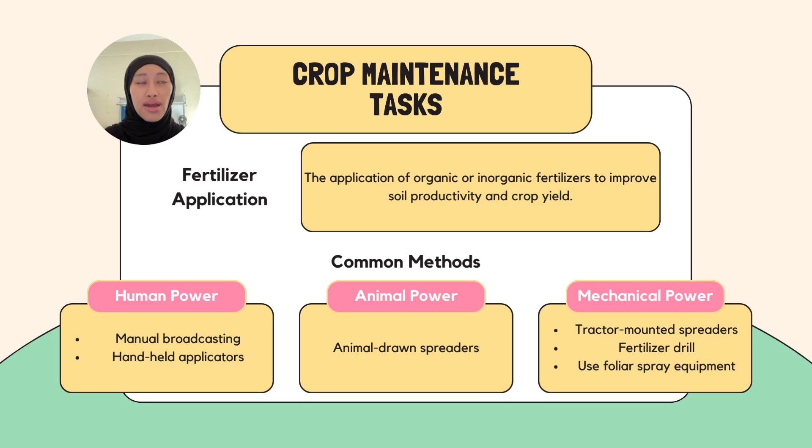Now we continue with the tasks performed in crop maintenance. Firstly is fertilizer application, which is the application of either organic or inorganic fertilizers to improve soil productivity and crop yield. Common methods include three types of farm power: first is human power, consisting of manual broadcasting and handheld applicators; next is animal power, using animal-drawn spreaders; and lastly mechanical power, using tractor-mounted spreaders, fertilizer drills, or foliar spray equipment for liquid fertilizers.

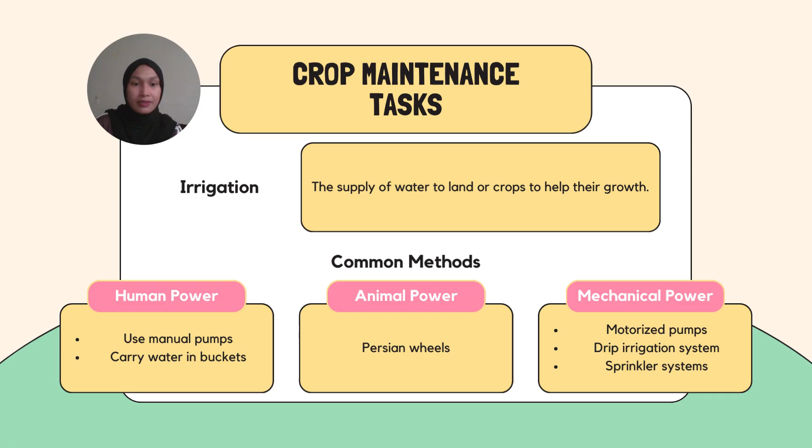The second task of crop maintenance is irrigation. Irrigation is the supply of water to land or crops to help their growth. Common methods can be classified into three: first is human power, using manual pumps or carrying water in buckets; second is animal power, using Persian wheels; and third is mechanical power, for example motorized pumps, drip irrigation systems, and sprinkler systems.

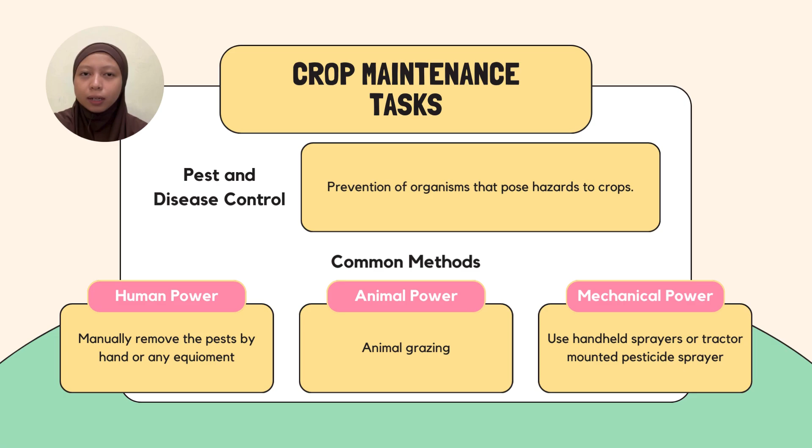The third task is pest and disease control, which is the prevention of organisms that pose hazards to crops. This can be classified into three common methods: human power, animal power, and mechanical power. For human power, we can manually remove the pests; for animal power, we can use animal grazing; and for mechanical power, we can use handheld sprayers or tractor-mounted pesticide sprayers.

Okay, now let's take a look at the equipment and machinery used in crop maintenance that is available in our company.

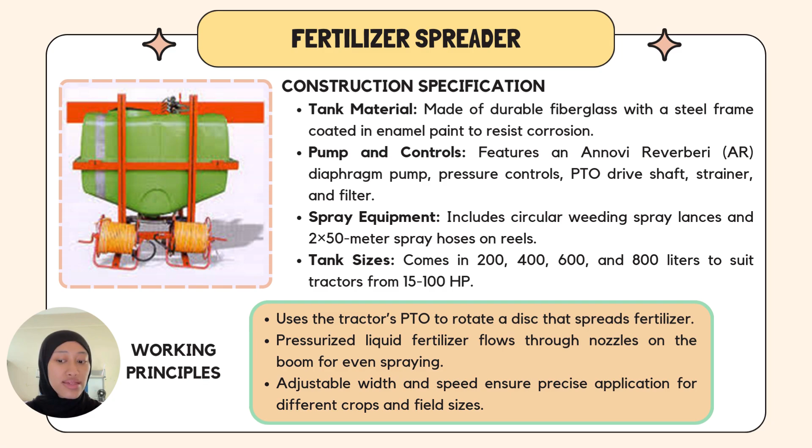As for the working principles, the MDEC fertilizer spreader is a tractor-mounted spreader. It uses the tractor PTO to rotate a disc that spreads fertilizer. Then the pressurized liquid fertilizer flows through nozzles on the boom for even spraying. It has adjustable width and speed that ensure precise application for different crops and field sizes.

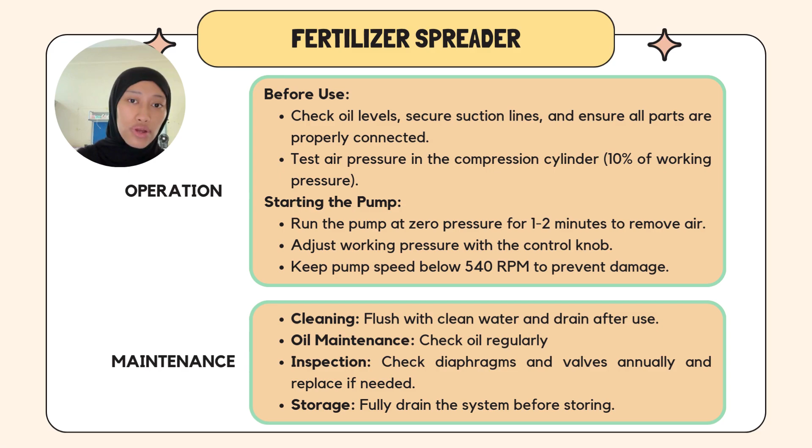As for the maintenance, there are 4 main points here, such as cleaning, which is to clean the tank by flushing with clean water and drain after using it, and the oil maintenance, where we need to check the oil regularly to make sure it's in the required level, and do inspections such as checking the diaphragms, pump and valves annually and only replace if needed. And lastly, storage, where we fully drain the system before storing.

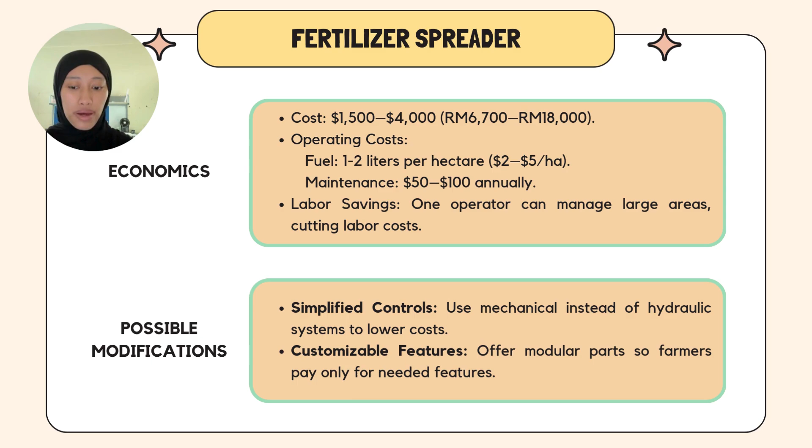Next is the possible modifications that we can do to cut costs for this spreader, such as using simplified controls that use mechanical instead of hydraulic systems to lower the cost. And then we also can make some features customizable by offering modular parts, so farmers pay only for needed features. So that's all from me.

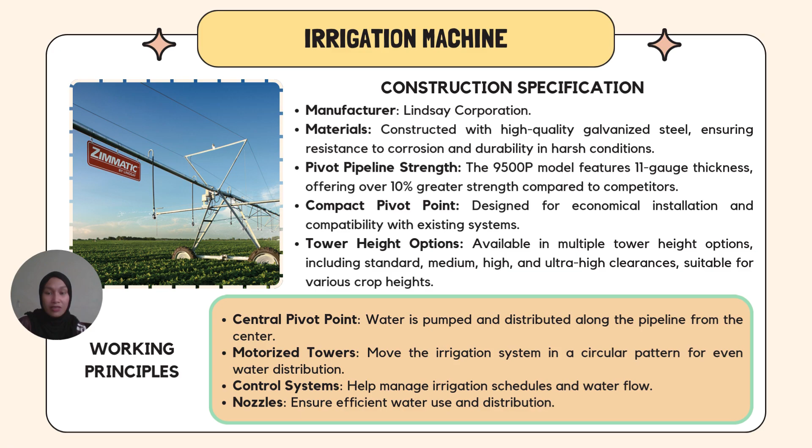The working principle of the Zimmatic system revolves around the central pivot point where water is pumped into the system and distributed along the pipeline. The motorized towers facilitate the movement of the irrigation span in a circular pattern, ensuring uniform water application across the field. The advanced control system allows precise regulation of irrigation schedules and water distribution, and the pressure regulators and nozzles are integrated to maintain consistent water flow even on uneven terrains, optimizing the irrigation process and conserving the water.

Operating a Zimmatic center pivot system is straightforward. After installation, the system is programmed using its advanced control panels to meet the specific water requirements of crops. The operator can monitor the system either manually or through remote monitoring tools. Depending on the model's features, adjustments can be made in real time based on environmental conditions such as soil moisture or weather patterns, ensuring that water usage is efficient and tailored to the crop's needs.

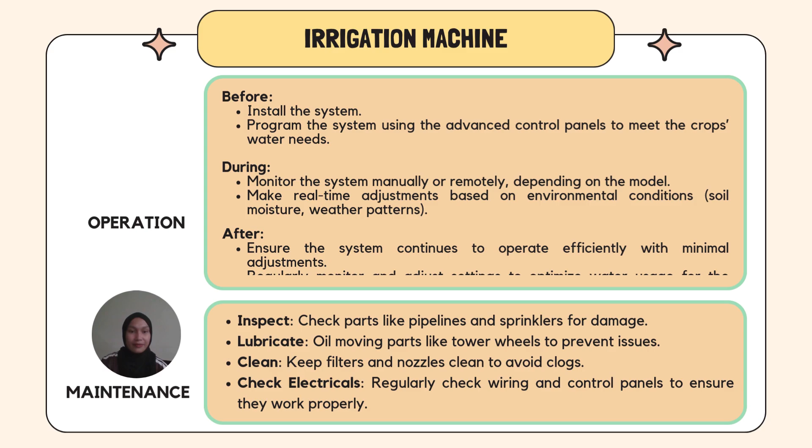Maintenance of the pneumatic system is essential for its reliability and efficient performance. Regular inspection of the structural components like pipelines and sprinklers is recommended to identify and address wear and tear. Moving parts such as tower wheels and joints should be lubricated periodically to prevent mechanical failures. Filters and nozzles must be cleaned to avoid clogging and maintain efficient water flow. Additionally, the electrical system, including wiring and control panels, requires routine checks to ensure proper functionality.

Pneumatic center pivot irrigation systems are a smart investment for farmers seeking long-term irrigation solutions. The initial cost ranging from RM 58,800 to 168,000 may be high, but the system's durability and low maintenance requirements contribute to substantial savings over time. Its efficient water application reduces waste, cuts water expenses, and supports sustainable farming practices.

The system automation lowers labor costs, allowing farmers to allocate resources more effectively. Lastly, it requires minimal maintenance, reducing repair expenses, and the financing options make it more affordable. Overall, pneumatic systems offer a durable, cost-effective solution for efficient and sustainable farming.

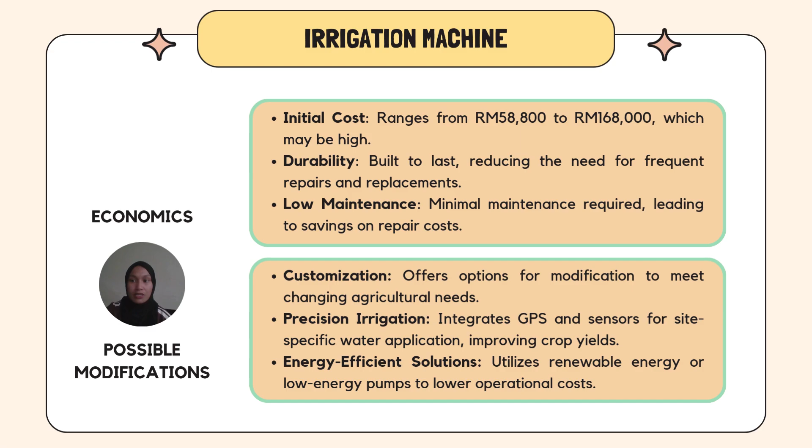The pneumatic system also offers opportunities for customization and modification to meet evolving agricultural needs. Precision irrigation can be achieved by integrating GPS and advanced sensors, enabling site-specific water application for better crop yields. Energy-efficient solutions such as renewable energy sources or low-energy pumps can further reduce operational costs. Upgrading to advanced control panels enhances the monitoring and management capabilities that allow farmers to optimize their irrigation practices.

Alright, next, the third equipment that we've chosen is for pesticides and control. For the construction specification, as we can see on the slide, we have the purpose of the tractor-mounted sprayer, tank and pump, boom and nozzles, and control system. So I will explain a bit about this. The tractor-mounted sprayer is designed for accurate and extensive pesticide application. The tank capacities range from 200 to 2,000 liters, suitable for farms of all sizes.

For the pump, the type of pump is centrifugal or high-pressure diaphragm pumps. The boom is made of lightweight and strong materials like stainless steel or aluminum. The nozzles are attached to the boom and made of durable materials like brass or stainless steel. And the control system includes pressure regulators and flow meters.

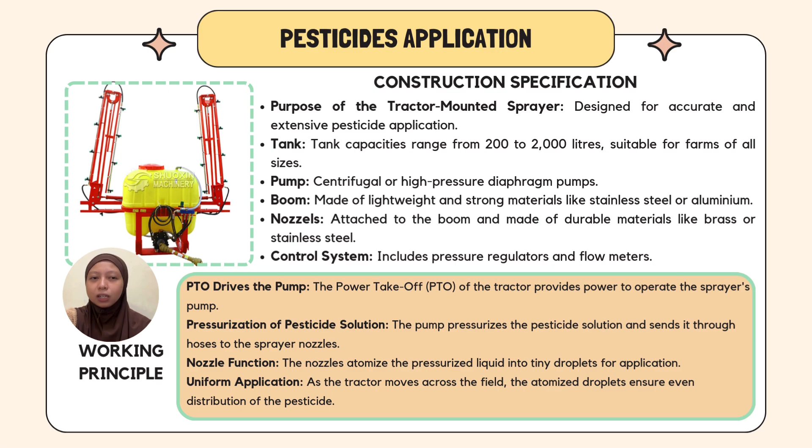Okay, next is the working principle. Firstly, the PTO drives the pump. The power take-off, or PTO, of the tractor provides power to operate the sprayer's pump. Secondly, pressurization of the pesticide solution: the pump pressurizes the pesticide solution and sends it through hoses to the nozzles. Thirdly, nozzle function: the nozzles atomize the pressurized liquid into tiny droplets for application. And lastly, uniform application: as the tractor moves across the field, the atomized droplets ensure even distribution of the pesticides.

Alright, on the slide we can see the operation and the maintenance. First, I will explain a bit about the operation. We have before, during, and after. Before, the sprayer includes a tank with a capacity of 600 to 1,200 liters filled with the pesticide solution, the tractor PTO, the power take-off shaft, is connected to power the diaphragm pump, and the hydraulic system allows adjustment of the boom height and width directly from the tractor. During, there is a steady flow of pesticide solution and uniform pesticide application. After the operation, operators can retract and adjust the boom to safe positions using the hydraulic system.

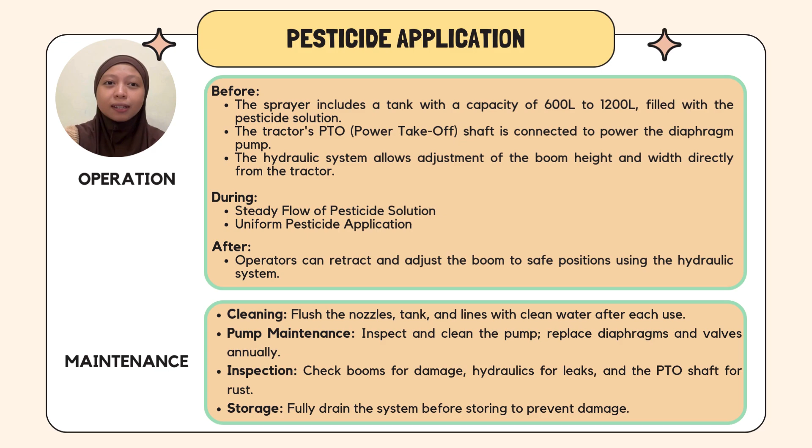Okay, for maintenance, we can explain cleaning, pump maintenance, inspection, and how to store it after cleaning. For cleaning, we flush the nozzles, tank, and lines with clean water after each use. For pump maintenance, we inspect and clean the pump, and replace diaphragms and valves annually. For inspection, check booms for damage, hydraulics for leaks, and the PTO shaft for rust. And for storage, we should fully drain the system before storing to prevent damage to the machine.

Next we look at the economic section of this equipment. On this slide we have initial investment, efficiency, labor savings, and time savings. For the initial investment, the cost ranges from 1,260 to 2,655 depending on capacity and features, making it a significant upfront expense. For efficiency, it covers large areas quickly, reducing the need for additional equipment and lowering operational costs. For labor savings, it's operated by a single person, eliminating the need for extra labor. So we can manage the labor needed and save costs from this. And for time savings, it can speed up spraying, ensuring timely treatments and better crop protection.

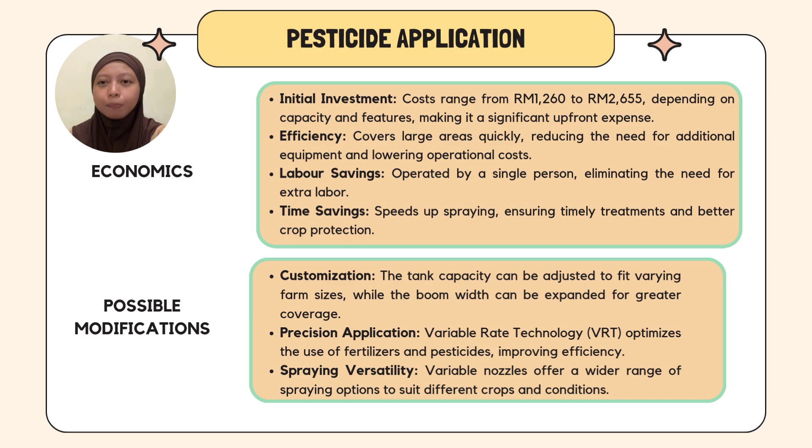Alright, lastly, we have possible modifications: customization, precision application, and spraying versatility. For customization, in my opinion, the tank capacity can be adjusted to fit varying farm sizes, while the boom width can be expanded for greater coverage. For precision application, variable rate technology can be applied to optimize the use of fertilizer and pesticides, improving efficiency. And lastly, spraying versatility: variable nozzles offer a wider range of spraying options to suit different crops and conditions. In this case, we can have more benefits. For example, we can increase yields easily.

Alright, the last part of our presentation is the conclusion. Farm mechanization significantly boosts agricultural productivity and sustainability by improving efficiency and reducing labor. Key tasks such as pest control, irrigation, and fertilizer application are crucial for healthy crops. By understanding both manual and machine-based methods, along with the specification, efficiency, and cost of farming equipment, farmers can optimize practices and reduce expenses. At Torio AgriTech, we provide innovative solutions that empower farmers and support sustainable agriculture. So that's all from us.